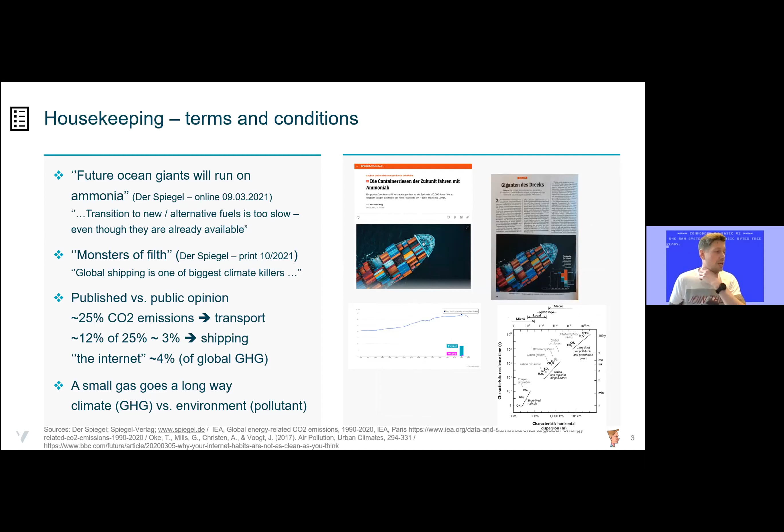So what we'll be looking at today is ammonia, a light in the black. You see here this little icon. I tried to organize the presentation so that everything related to introduction and housekeeping has this item, and we say some words about the shipping industry and shipping itself. We move on to the fuel portfolio, not only talking about ammonia, but about some of the options. We take a look at the logistics, at storage and bunkering, related to regulations and safety also. We take a look at the conversion and use of ammonia, and then we hopefully summarize and conclude with something, or I will conclude with something. You, of course, are open to conclude for yourself, and then we can see whether this is a light in the black or just the fear of the dark.

Based on other presentations I saw, I think it's always a good way to start off with a joke. For those who don't know, 8 out of 10 Cats is a UK panel show, pretty much Family Feud after the watershed. And they had a topic, the top cause for family arguments. The moderator, Jimmy Carr, introduced it and said, I don't understand the airport one anymore, with the advent of Uber. Why do you have to pick up people from the airport? And he got mocked by the other panelists, because some people need to pay taxis and have to get trains. And Jamali said that's some proper rich dude shit. Why doesn't everybody just get a private car? Or can you just pay a man to jump on his back and run there?

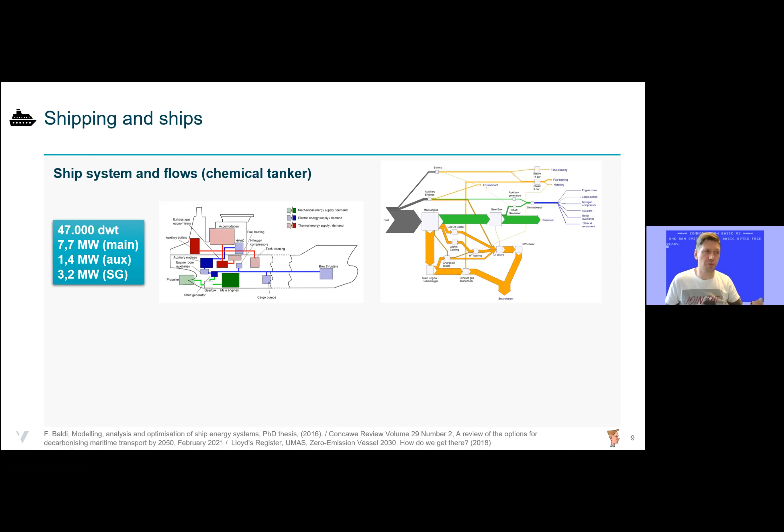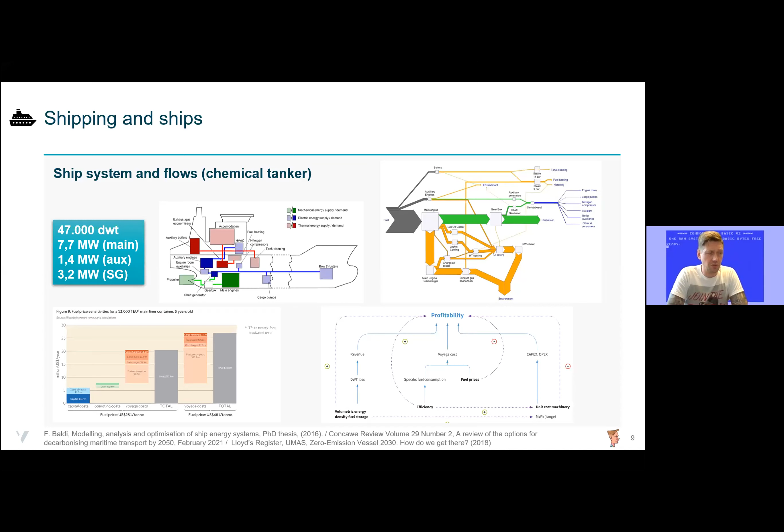So if you change the fuel, if you change the volume density, if you change something about the installation on board so that you have less cargo space, if you have higher first cost or higher capital expenses, this all affects. So you can't separate these from the environmental measures or from reducing the climate profile.

So here are some numbers now of CO2 emissions. This is from the EU monitoring, reporting, and verification of CO2 emissions, status 2019, which has been published. All of the ships going into and out of the EU have to report their CO2 emissions. You can see it's a logarithmic scale. You've got the biggest one, the container ships, contributing with 50 million metric tons of CO2 per year. You've got bulk carriers, far over 10 million. So it's a lot of CO2.

And I just did some simple calculations. You see some of the numbers here, what reduction potential you have if you would assume that all of these ships are operated by two-stroke engines and they would be converted to high pressure dual fuel engines with a pilot fuel of 1.5% in case of LNG, 3% LPG, 5% methanol, or 8% ammonia. These are rough numbers.

The actual numbers can change, but then you would get a decrease overall by 27% for LNG, roughly 15% for LPG, 8 to 9% for methanol, and of course ammonia, the biggest reduction, as it's not a hydrocarbon-based fuel, over 90%.

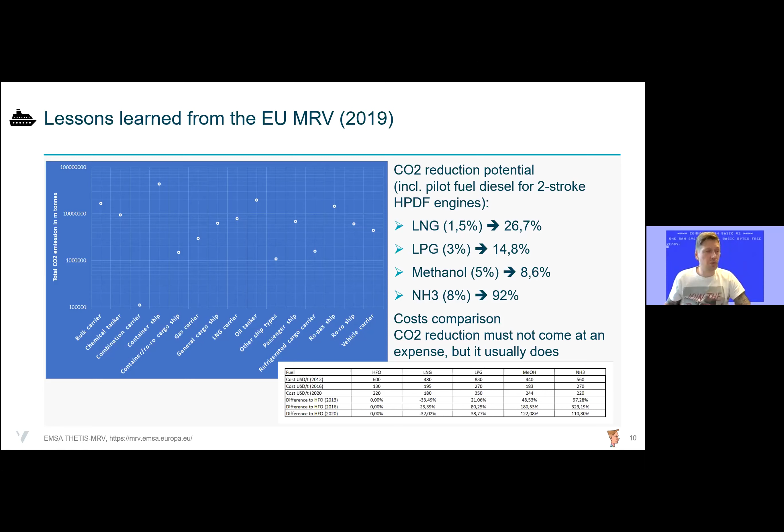So what are the actual candidates apart from ammonia? That is just a brief overview. I started with looking at all of the reports that have been published in 2018, 19, 2020, 2021. I think it's roughly 30 or 50 big reports from known institutions: DNV, the OECD, the International Chamber of Shipping, UMAS has a lot of great reports. The UK has a clean maritime plan. There are many others. ABS has, Shell has some information, so there's a lot of information about the fuel.

Most of them have introduced ammonia. The UMAS report, which is a little bit older, has just hydrogen or hydrogen-related fuel, not yet ammonia, but we've seen from 2018, 2019, ammonia has emerged, has solidified its position as an alternative amongst other fuels. Still, the base case is oil, biodiesel, and LNG, or, as the DNV GL with this huge job they've done with the 30 scenarios, also looking at e-fuels.

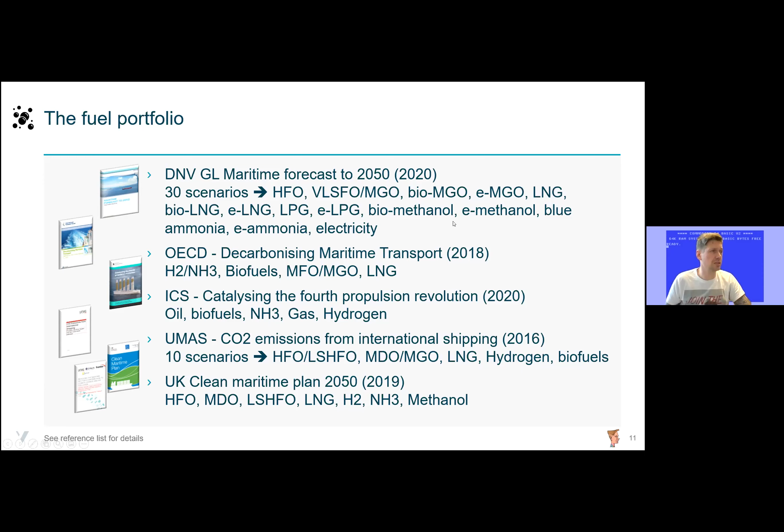So we'll just take a look at some of the numbers for this fuel mix. I included hydrogen. Some of the numbers you should take with a grain of salt, as you can find a lot of different values at different outlets, different publication sites for these components, but I try to stick with the ones that are most commonly used. LNG is mainly methane; for LPG I mainly used the values for propane.

And you see that ammonia has, depending on how you look at it, favorable or not very favorable properties compared to today's standard liquid or gaseous fossil fuels. Of course, high flash point and high auto-ignition temperature are favorable with respect to safety, but with respect to the combustion process, it's not necessarily beneficial.

In addition to the heating value, even not taking the tank insulation and the tank installation into account, everyone, based on diesel, looks poor. They have a lower volumetric heating value. Taking the tank installation into account, it's even worse. So you need to accommodate much larger spaces for the storage of these fuels.

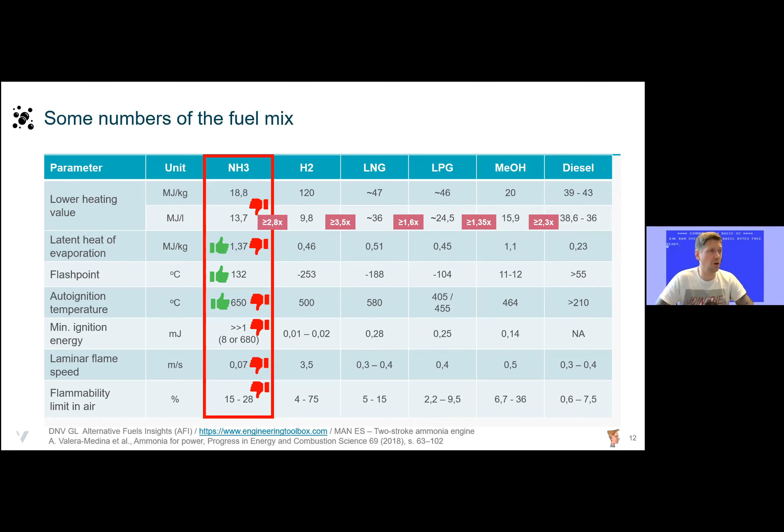And in addition to the actual fuel properties, you of course also need to look at the fuel pathways, because as I introduced with CO2 as a climate gas on a global scale, if you want to compare these fuels, you need to look from cradle to grave, from production to at least supply to the tank, how the fuel is performing on a climate or CO2 emission basis.

And this overview from the CONCAWE and JRC well-to-tank analysis does not include ammonia yet, but it would be somewhat similar to hydrogen, because the main part of ammonia is the hydrogen production. The air separation and the Haber-Bosch process are not that significant from an energy point of view compared to the hydrogen production. So you see that you can end up worse with a carbon-free fuel compared to a hydrocarbon-based fuel.

And something else that needs to be considered is the energy return on energy invested. So how much energy you get from the fuel divided by the energy required to deliver the energy of the fuel. And everything below 1 is basically an energy sink, meaning that you have to put more energy into getting the fuel energy than you get out of the fuel.

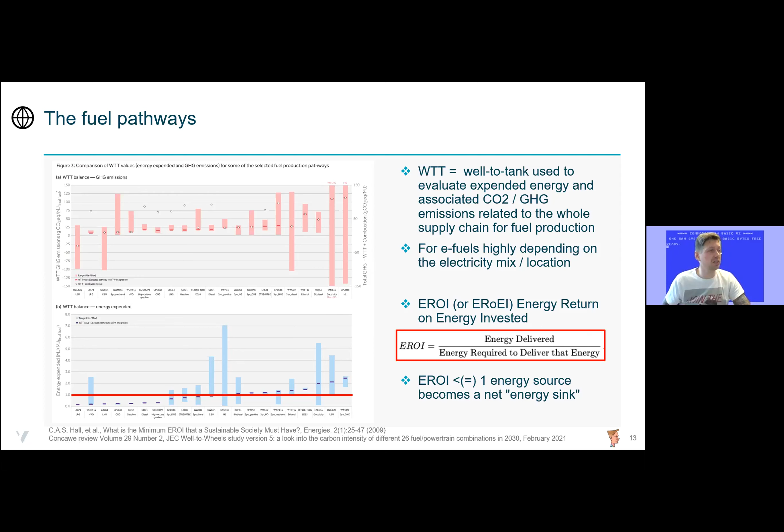Similarly, ammonia is also transported. Ammonia has import and export ports all over the world. So from a logistic point of view, it would work, and similarly for methanol. That's also why carriers for these commodities already exist in large numbers.

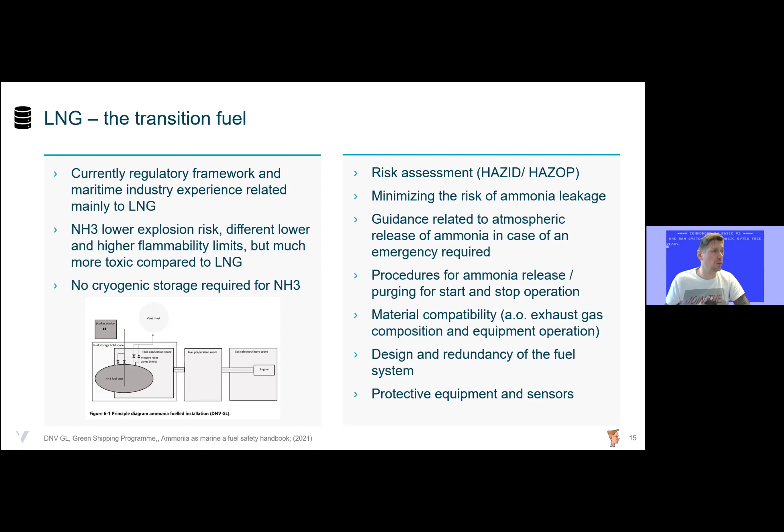And it's important, as the IGF code also mentions, that it has to be as safe as an oil fuel installation. You need to think about redundancy of the fuel system itself, and especially of the pilot fuel and also the auxiliary engines, so that you can ensure a safe operation of the vessel. So the most important part in all cases is reducing the risk of ammonia leakage and the impact that it may have on persons around through exposure to ammonia.

So now, before getting into the part of the regulation, just take a brief look at the timeline for the development of the regulations with respect to greenhouse gas emissions. First starting with the IPCC introduced in 1988, the Kyoto Protocol, the Paris Agreement, and again the IGF code, how long it took from the first draft of the IGF code in 2004 until it was adopted and entered into force 13 years later.

You remember your average vessel lifetime. So this is quite a challenge for the introduction of the technologies if you don't have the regulation ready at the time, and if you want to retrofit or renew your vessel or your fleet, that you have something you can base this renewal on.

And here are some selected IMO regulations which would be applicable in this case. The IGC code, of course, if you carry ammonia, you could use it as fuel, but this is forbidden as it's toxic, so it's not allowed to use toxic products as fuel. So you need to change or amend it if you want to use this kind of installation, or the IGF code for low flash point fuels.

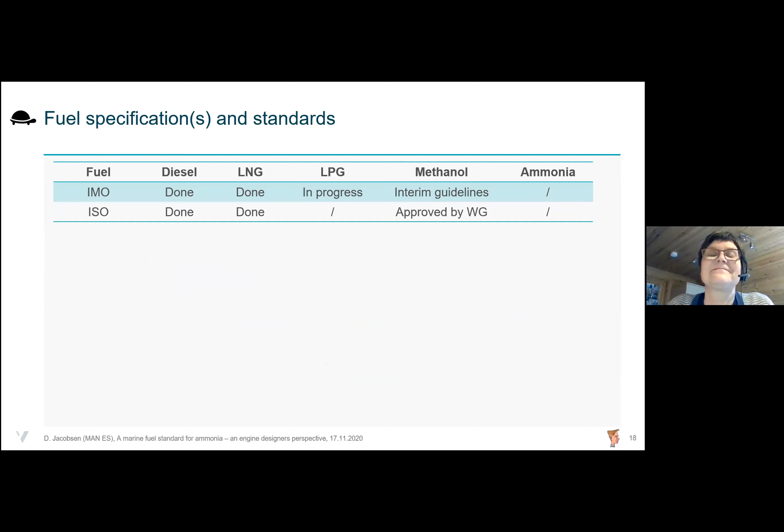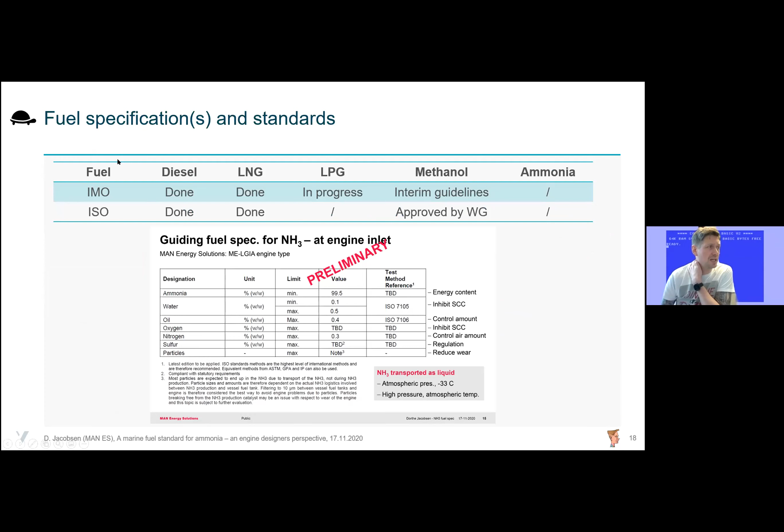So looking at the fuel specification, MAN has released a preliminary fuel specification for ammonia, but from a standard point of view, nothing has happened yet. Only diesel and LNG are implemented. If you take a look at the conversion process, looking back, of course, a lot are referring to the tests that were done in Belgium in 1943.

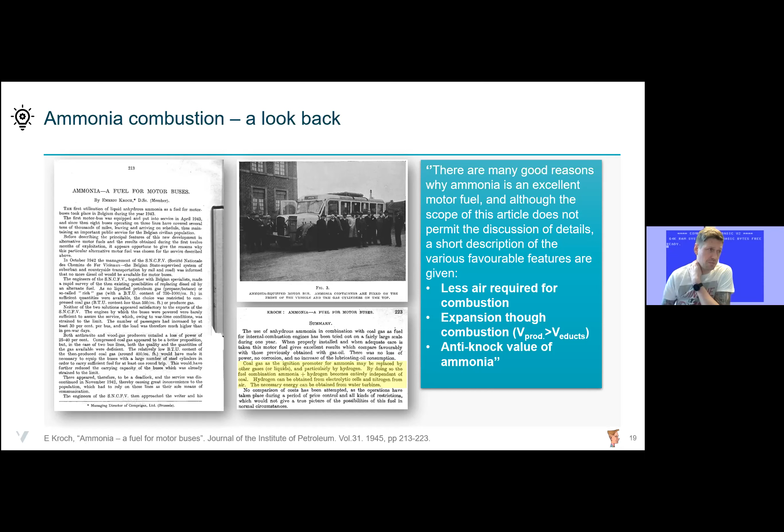Already looking at good reasons using ammonia: good anti-knock value. This is something that you will see a lot of the time, as most of it was done on spark-ignited engines. A lot of interest was gained in the 1960s and 70s, especially in the US, from a military point of view: nuclear fuels, using small nuclear power plants to produce ammonia and use it as fuel in spark-ignited or compression ignition engines. The general conclusion was spark-ignited are to be preferred, but you need a very high energy source.

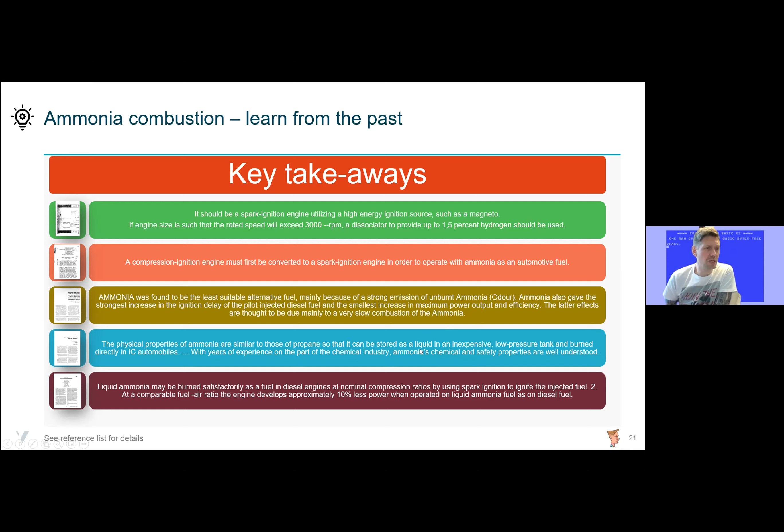The Danish test, which tests a lot of alternative fuels, found ammonia to be the least favorable fuel, also based on their engine setup. But generally, it can be burned, it can be used, but you need to consider some stuff. So where do we go from here? Ammonia is not likely to be used in a monofuel engine. From my point of view, it will be used in low or high pressure dual fuel engines. If you want to use it in a spark ignition engine, we will use some kind of dissociation device that generates hydrogen and use hydrogen assistance in the combustion, especially for larger engines.

You need to take a look at the heat of vaporization if you inject it as a liquid. You need to take a look also at the combustion products. You will produce a lot of water. You will have higher NOx emissions. You need SCR for sure. And of course, you need to look at nitrous oxide, as it's a heavy climate gas.

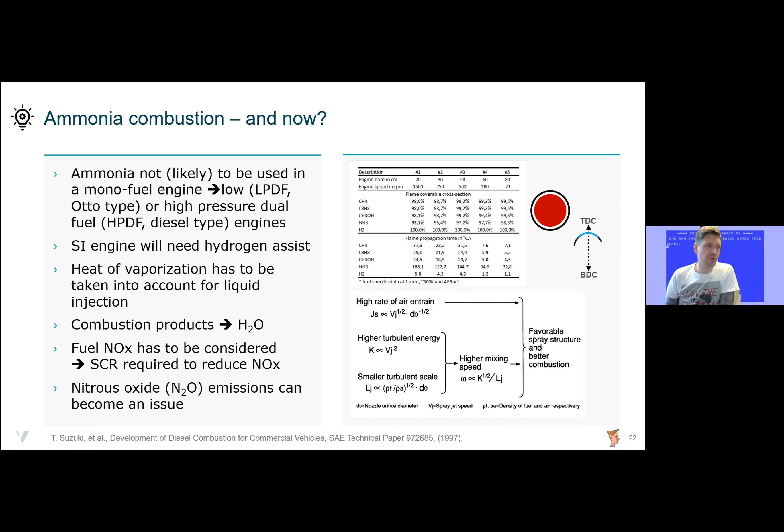Also, if we look at the flame propagation, we take a look at the flame speed and how much time in crank angles, in piston movement, it will take to combust the fuel. Ammonia takes quite a long time to have a full combustion on the laminar flame speed. So this is much less of a burden for a two-stroke slow speed engine. And you need to include some kind of external kinetic energy, which you can get from a high pressure diesel injection, which is actually the concept that is proposed by MAN for their two-stroke engine.

So we stick the landing now, wrapping it up. This is quite a good podcast that has been done with the now CEO of Maersk. I'm not going to butcher his last name. And he pretty much sums it up that they have two candidates, ammonia and methanol. Methanol has a very low flash point. It's a safety issue. Ammonia is toxic. It's also a safety issue. But we need to get this done right now, because if you want to think about 2050, with 20 years of ship life, you need to have it done by 2030. Otherwise, you won't be using it. And the beauty of using these in a combustion engine is that you can retrofit the existing ships with that.

A little callback from the 2010 CIMAC Congress in Bergen. There was the question, what's the future fuel? And the answer from a Maersk representative was, the obvious answer would be still heavy fuel oil, but with some kind of emission treatment devices and some emerging patchwork of alternative fuels. So they have quite a good track record. I think that this statement still stays true today.

So if we take a look at where we started, why doesn't everybody move to hydrogen fuel cells? It's, of course, because some people need to pay freight taxes, fuel bills, and have to get to all kinds of places all around the world. And because you simply can't pay or force companies to build new vessels and exchange their machinery. So is ammonia the obvious choice as a fuel for ships? No, but it can be, depending on some individual parameters, especially regulation, incentives, the economics and logistics, as we see from the uptake of scrubbers. So this is something to learn from.